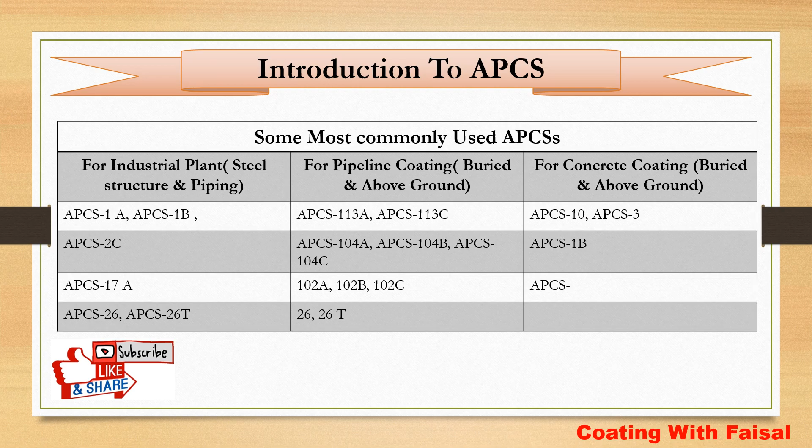So guys, this video will be very informative, and maybe it will be long, but you should listen and watch this video very carefully if you are new in the field of coating, or already working in coating as a coating supervisor or coating inspector. This will increase your knowledge. So now we move to our topic.

What is pipeline coating and what are the types of coating in the pipeline? First of all, we categorize the pipeline into two portions: the buried term and the above ground term. Buried means the pipeline which is buried below the ground level, or buried in the sand. It can also be buried in the sea. So for the buried pipelines, we perform two ways of coating, depending upon the requirement: one is external and the second is internal.

First of all, you have to clear your knowledge regarding what is external coating and what is internal coating. External coating means the outer layer of the pipe is coated. Suppose the pipe is buried, and we have to coat the external layer to protect the pipe from rust and from soil behavior - this will be the external coating. Internal coating means the inner portion of the pipe is coated.

This depends upon the service which is going to pass through the pipeline, on which basis we decide whether internal coating is required or not. All buried pipe is externally coated, but not all buried pipe is internally coated - this is decided on the basis of the service. Sometimes severe chemicals or streams pass through the pipeline which will affect the inner portion of the pipe, so we protect that inner portion with coating. Otherwise, normally the pipe is not internally coated, but all pipe is externally coated.

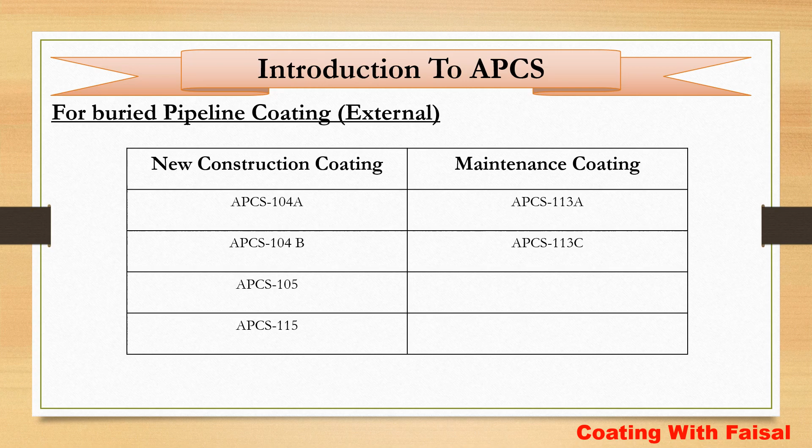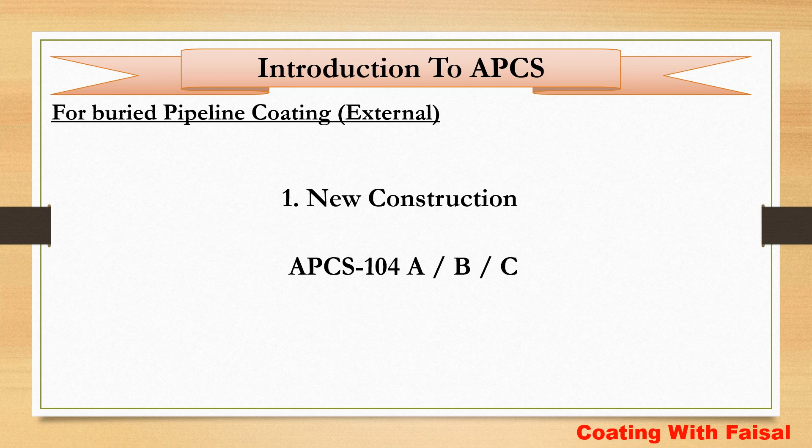But as a coating inspector, there should be some knowledge, some information definitely known, whether it belongs to the contractor or not. In this video we will discuss only the surface profile requirement and the coating thickness for new construction coating. So first of all, APCS 104A, B and C. This is only one coating system, but it's subcategorized into three divisions: APCS 104A, 104B and 104C. Now we will see what is the difference between these three types.

First of all, APCS 104A. This is titled Shop Applied Fusion Bonded Epoxy. As I already told you, new construction coating is performed in the workshop, so the title reflects that shop applied means this application is not performed on the site, it's performed in the workshop. Next is fusion bonded epoxy.

What is fusion bonded epoxy? This is a type of coating, same as some coatings are epoxy coatings, some coatings are viscoelastic. And what is fusion bonded? This is a powder coating applied by machine, not by manual applicators. So this is the powder used during the application of fusion bonded epoxy.

The pipe is preheated to about 200 or 220 degrees Celsius, as decided by the coating manufacturer. The coating is applied in the form of powder. When the powder falls on the pipe surface, which is already preheated to about 220 degrees Celsius, it melts and forms a layer on the pipe. All of this function is performed by the FBE application machine, not by any applicator.

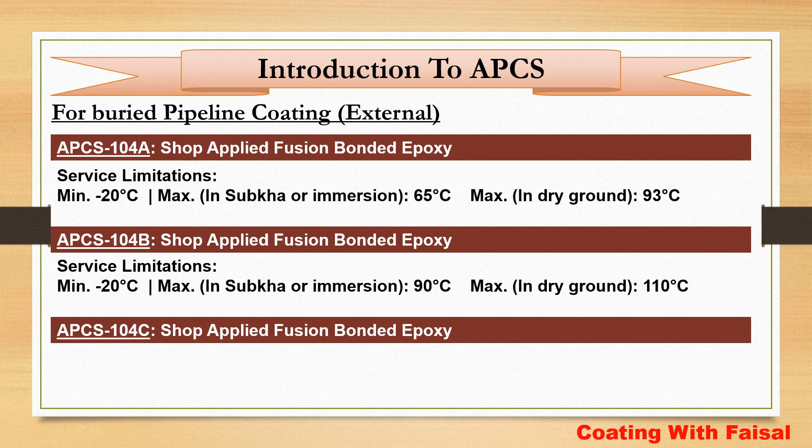Next, APCS 104C. This is a service temperature rating - you can see it can bear the temperature of whatever passes through it up to 130 degrees Celsius.

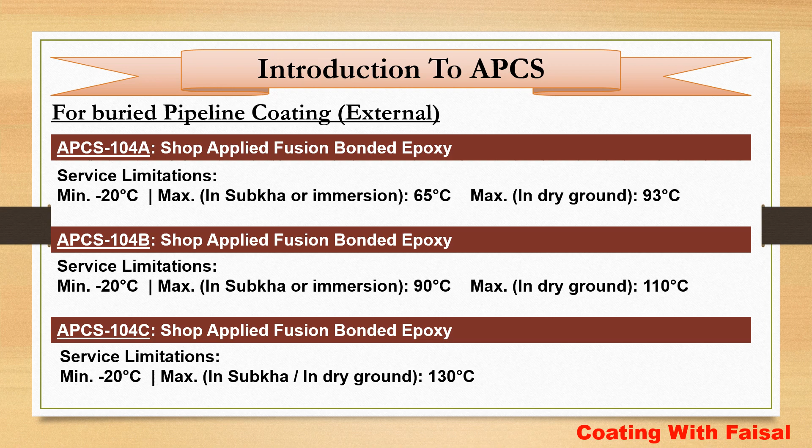On the site we can only perform FBE coating for the girth weld areas, because when the pipe arrives on site, it should be joined - there are some joints, some girth welds. That's why as a coating inspector you also need knowledge of the surface preparation required before the application of fusion bonded epoxy.

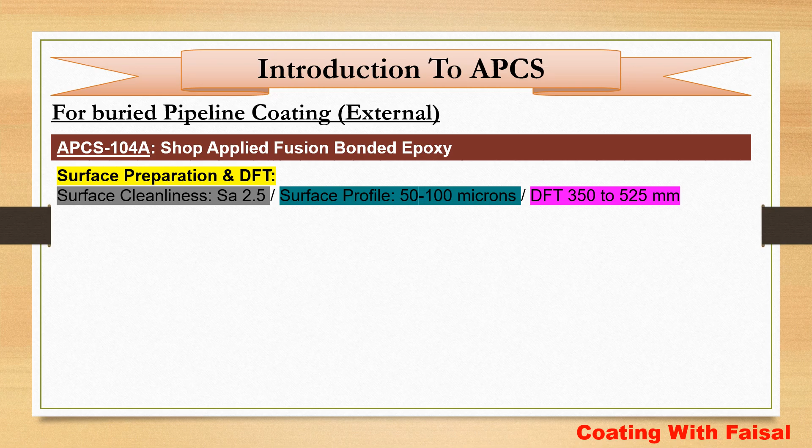The cleanliness level should be SA 2.5, and in the previous introductory video I already shared what surface cleanliness is and what the levels of surface cleanliness are. SA 2.5 is the near white metal blast cleaning, and the surface profile range is 50 to 100 microns.

The next one is the dry film thickness. DFT should be 350 to 525 microns. This is the requirement for APCS 104A.

Next we see the requirement of APCS 104B. The surface preparation is the same, only the difference is dry film thickness. The DFT range for APCS 104B is 575 to 750. Why is it more than APCS 104A? As I already discussed, APCS 104B can bear more temperature compared to APCS 104A, so definitely the thickness will be higher.

Last one, APCS 104C. The surface preparation requirement is the same as B and A, but the thickness should be as per manufacturer recommendations.

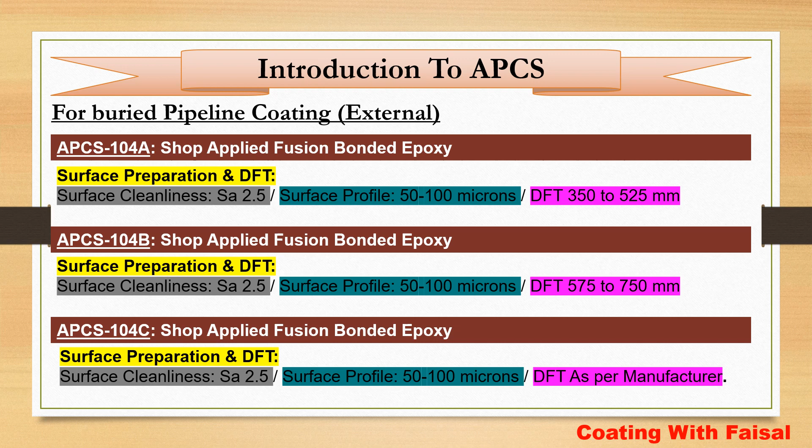So guys, next we discuss the FBE coating externally and new construction coatings. Now we move to the next topic, regarding maintenance coating.

In maintenance coating, first of all there is APCS 113A, and the title of this type of coating is high build epoxy.

It's also called epoxy mastic coating, and this is a very important type of coating used in pipelines for maintenance work.

As I told you in the beginning, as a contractor coating inspector, most of your scope of work is maintenance work, because new construction coating is applied in a workshop for the pipeline. This is not part of the contractor inspector's role, it's part of the vendor inspector's role.

So most of our jobs are available on the contractor side, and on the contractor side we have maintenance work for the pipeline. In maintenance work, the most commonly used coating is the high build epoxy.

So you should listen to this type of coating very carefully. I already shared the important topics which can be asked in the interview regarding this type of coating.

So we move to maintenance coating. First of all, 113A, and the second one is APCS 113C. This is the viscoelastic coating.

What is the viscoelastic coating? It means it is a tape wrap. It's not a liquid application, it is a wrapping application, and we will see this in the pictures also in the coming slides. So first of all, let's get some details regarding APCS 113A.

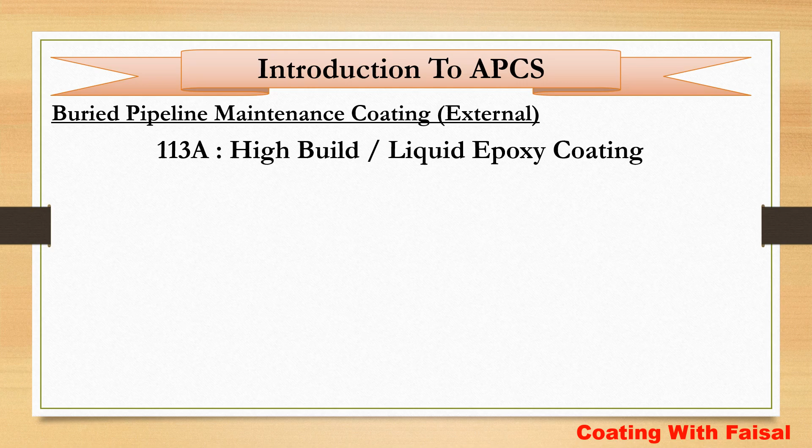The surface preparation requirement: surface cleanliness level SA 2.5, the surface profile range is 65 to 100 microns. Next, some important parameters which differentiate this coating from other liquid coatings.

You must remember these parameters because these are the specific properties of this type of coating which differentiate it from other types of coatings.

First of all, it's a multi-component coating. What is multi-component? It has three components: base, hardener, and thinners, and the mixing ratio will be decided as per the manufacturer data sheet.

Next is high volume solids. What is volume solids? Volume solids is the solid content which is left behind on the surface after the paint is dried. So the higher the volume solids, the less the difference between the WFT and dry DFT.

Next is single coat coating. There are only a few coating systems in Saudi Aramco which are single coat, and this is one of them - it is applied in only one coat. It should not be applied in multiple coats.

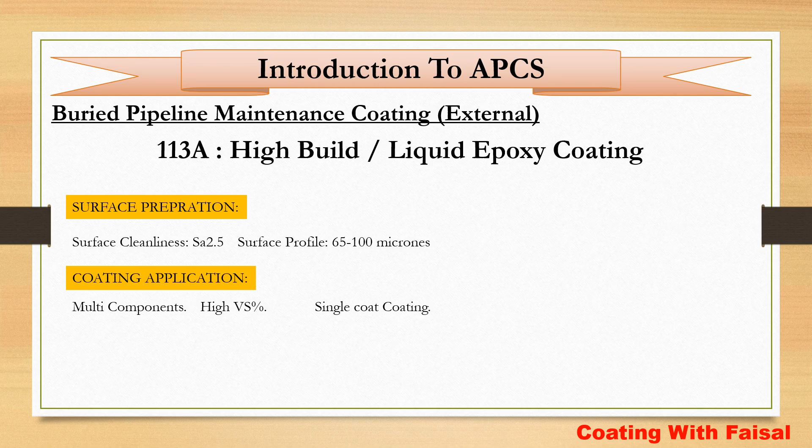But due to high volume solids and high thickness, it's difficult to maintain the thickness, so this coating is allowed to be wet on wet coating.

Now definitely you will think, what is wet on wet coating? Wet on wet coating means if you apply one layer and it is still wet, you can apply the second layer.

to maintain the thickness, because if you give more wet film thickness at one time, your paint definitely will sag, it will flow down. So what is the technique for this type of coating? You should apply wet on wet coating in one or two layers, but the coat should be single.

The next point regarding this coating: the WFT should be 610 microns to 1010 microns, and dry film thickness will be 600 microns to 1000 microns. Here you can see there is a very minor difference between the WFT and DFT for this type of coating.

This is because of higher volume solids. From the definition of volume solids, we can see that the solid content in the coating is left behind. So the higher the solid content, the less material will evaporate, and the difference between WFT and DFT will be very low.

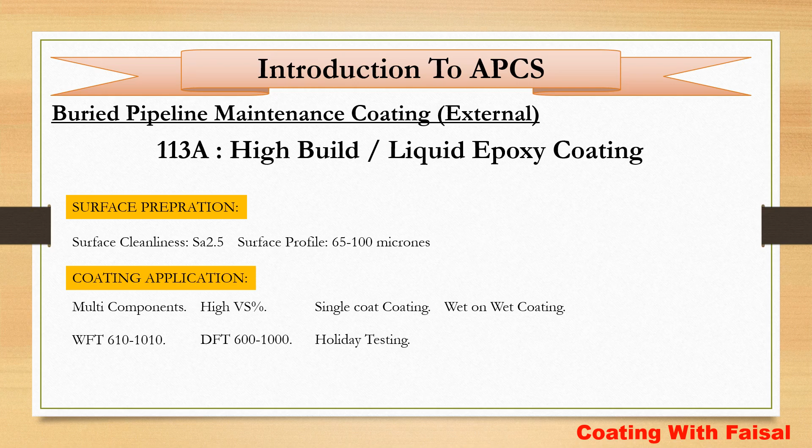Now we move to the second type of maintenance work, APCS 113C. This is the viscoelastic coating, which I told you is a tape wrap.

For 113C, we most commonly use STOPAQ, which has two wraps. The first is the CZH inner wrap, also available as CZH paste, where CZH is the material name. The second part is the PVC outer wrap, also in tape form, and it is black in color.

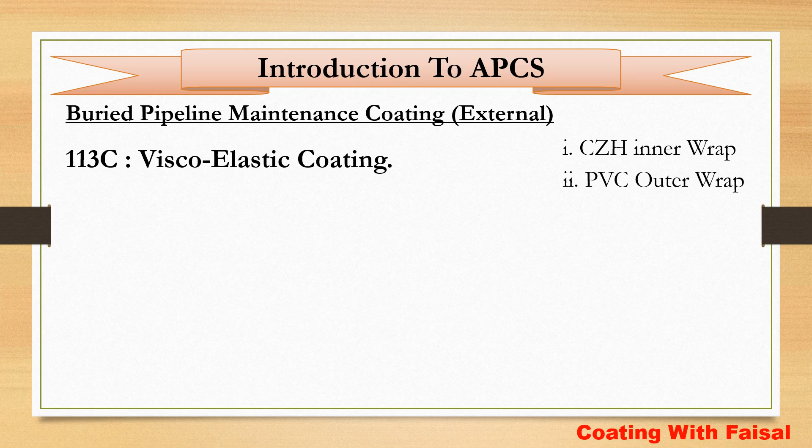This is the monogram of STOPAQ. Any product with this monogram means it's a STOPAQ viscoelastic coating, applied in two portions. The first portion is the inner wrap, normally green color, and the outer wrap is black color - this is the PVC outer wrap.

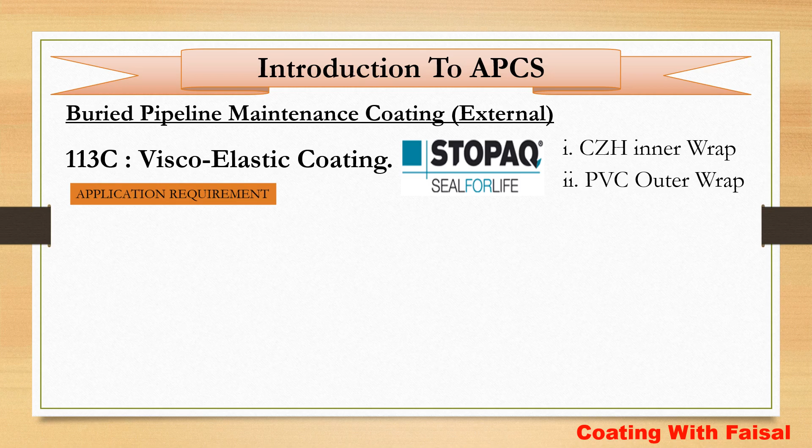What are the application requirements for STOPAQ? First, personnel involved in protective coating activities shall be qualified and certified to perform their task. Any applicator willing to perform this application should be certified from STOPAQ. STOPAQ will give them training on how to use their product, what the overlapping requirement is, and what the seal wrap is. All these trainings are given by STOPAQ, and once the applicator is qualified, they give him a certificate, called the qualified certificate.

This means an unexperienced person cannot perform this job, is not allowed to apply this STOPAQ. The second requirement is that blast cleaning is recommended if the pipeline length is more than 1 meter. This relates to surface preparation - if the pipe length is more than 1 meter, it should be blasted before performing the STOPAQ application.

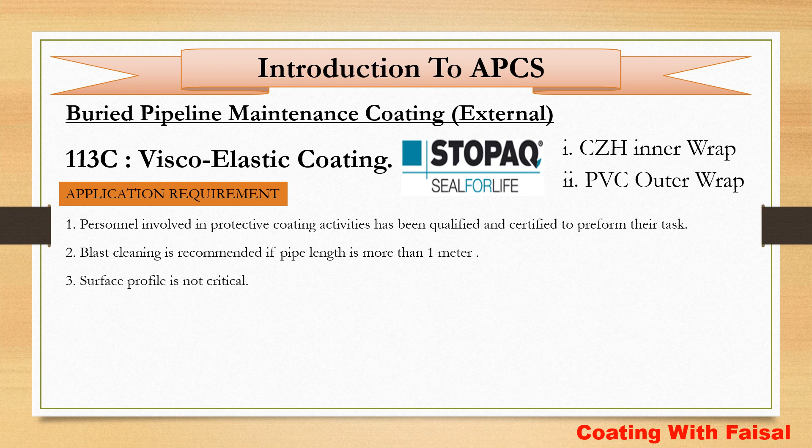The third one is that the surface profile is not critical. As we discussed previously, surface preparation involves two things: surface cleanliness level and surface profile. For the STOPAQ case, the surface profile, or roughness, is not critical, but surface cleanliness level is critical - it should be Sa 2.

For using CZH paste in areas which are not properly smooth, suppose there are some flanges, wellheads, or pumps - those are not uniform, so we apply this wrap differently. We apply the CZH paste, and as you can see in the next picture, there are flanges and uneven surfaces where we cannot apply the inner wrap uniformly or smoothly. So in those areas we use CZH paste.

What is the requirement? The CZH paste should be applied from the higher level to the lower level, or from the higher edge to the lower edge. Once we apply the CZH paste, we should immediately apply the CZH wrap, because for uneven surfaces, flanges, and sharp edges where we cannot directly apply the CZH wrap, we first apply the CZH paste, then immediately apply the CZH wrap, and then the PVC outer wrap.

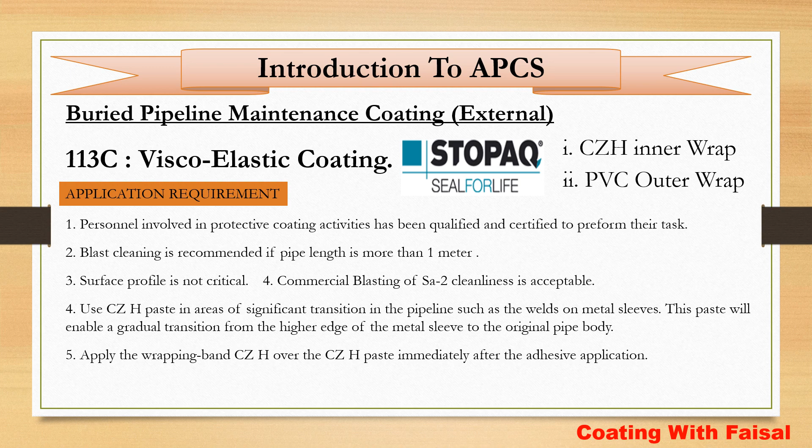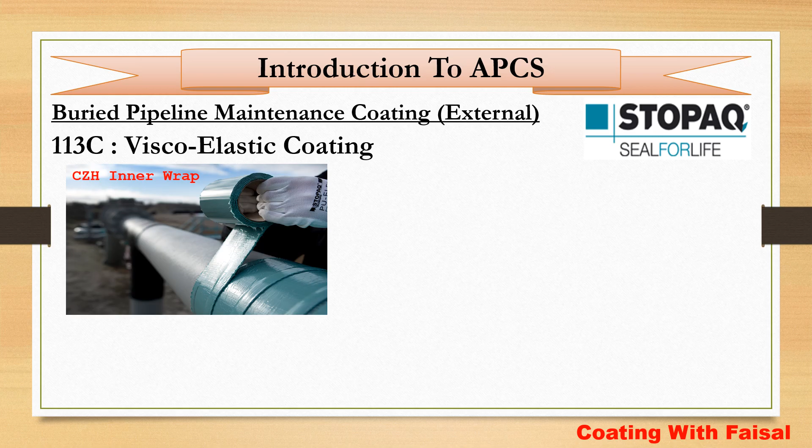Next, you can see the CZH inner wrap in the form of wrapping, and in the second picture the CZH paste. If we want to apply this wrap directly, it's not possible because this is an uneven, not smooth surface. To make the corner smooth, we first use CZH paste, then immediately apply the CZH wrap, and after that finally apply the PVC outer wrap.

This is the most important thing: the inner wrap shall be applied without tension or stretching. This is one of the most commonly asked interview questions regarding pipeline or STOPAQ coating - whether we can apply the inner wrap with tension or stretching. Your answer should be that the inner wrap shall be applied without tension or stretching the roll.

Next, we will see the procedure for applying this CZH wrap. The first wrap round of the wrapping band is done without advancing the roll. What is advancing the roll? The first wrap should be completed circumferentially - you cannot move longitudinally along the pipe. This is the meaning of without advancing. First you complete one circumferential wrap, then you can move longitudinally, or advance the roll.

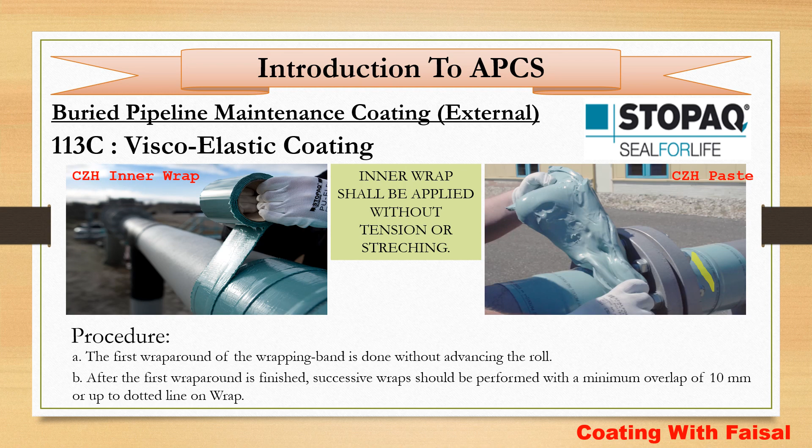Here we see this next one is a buried pipeline maintenance coating. Now we will discuss the outer wrap.

It says that when a roll of the wrapping band is finished, the next roll should start with an overlap of at least 100 mm. It means suppose you are doing the application and your one roll is finished and you're using the second roll, so at least you will give the 100 mm overlap to the existing wrap, then you can move the advancing roll.

Next, after the pipe is completely wrapped, another circumferential wrap is done at the pipe at the end, and this acts as a seal wrap. So once you finish your job, suppose your inner wrap is complete, at the end of that wrap you should apply one more wrap circumferentially. This is known as a seal wrap, and this will make sure that your corner or edge will not be removed.

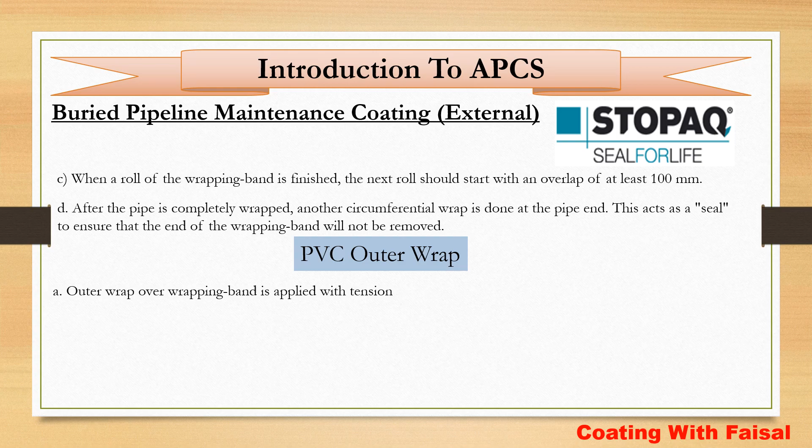As we already discussed in the previous slide, for the inner wrap, the inner wrap shall be applied without tension and without stretching. But for the outer wrap this is completely opposite - the outer wrap shall be applied with tension or with stretching. You must remember this difference between inner wrap and outer wrap for stretching and tension.

Next, the wrapping band of the outer wrap shall start 5 mm from the start of the wrapping. It means you should start the outer wrap by leaving a 5 mm corner exposed, so it should be visible. The inner wrap should be visible for the 5 mm. This will reflect that you already applied the inner wrap and now you are applying the outer wrap.

The next one is the first wrap of the outer wrap, overlap wrapping band is done without advancing the roll, same as the previous internal wrap. The first roll circumferentially should be without advancing. First you complete one roll circumferentially, then you should advance the roll, or move the roll longitudinally.

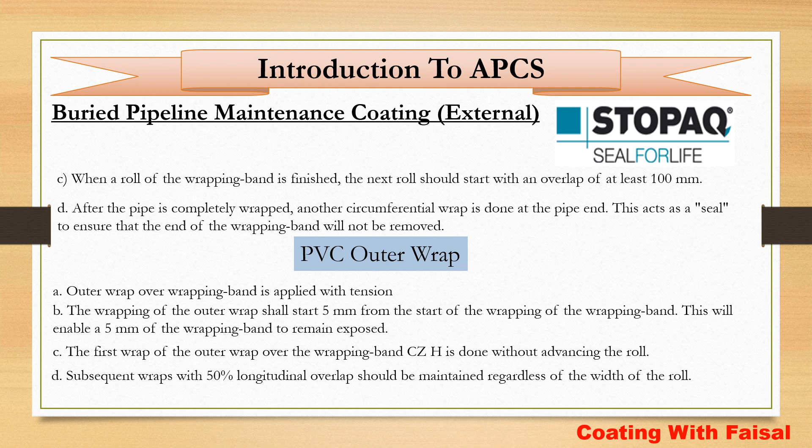And since we discussed previously that for the inner wrap the overlapping is 10 mm or as per the dotted line, for the external wrap the overlapping is 50% of the width of the wrap, regardless of what width we are using. It means suppose we are using the outer wrap of 25 centimeter width, or we are using the outer wrap of 40 centimeter width, the overlap will be 50% of that width.

So the next one is, if a roll of outer wrap is finished, the succeeding roll shall be initiated with an overlapping of 25 centimeter. You should remember the difference between the inner wrap and the outer wrap - in the inner wrap, the overlapping is 10 centimeter, but for the outer wrap, the overlapping is 25 centimeter.

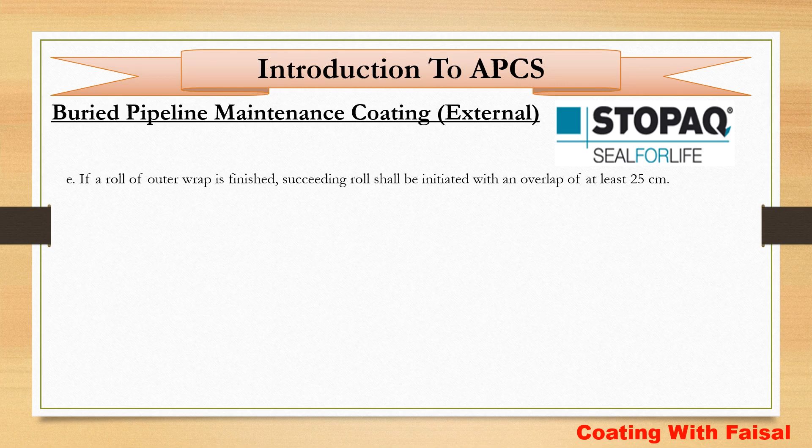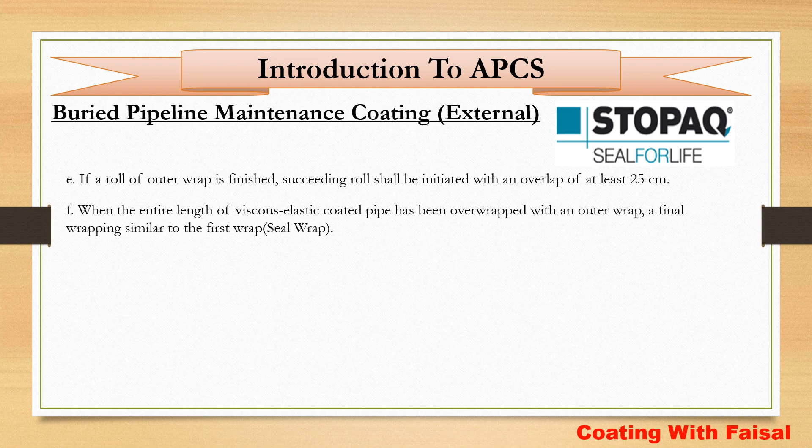This is the difference for both wraps, and same as the inner wrap, at the end of your work you should apply the seal wrap - one additional circumferential wrap.

So guys, since this is already a detailed video, and already a little bit long, it is difficult to explain in detail the second one, Canusa application. This is also a part of maintenance coating for the pipeline, and if you need to review further coating systems in detail, you can study the Saudi Aramco engineering standard H002.

For the application of Canusa CPS, this is also a viscoelastic coating, and another manufacturer is STOPAQ, which is most commonly used, and Canusa is also extensively used for the maintenance work of the pipeline.

So for the Canusa, there is a difference - another video will be available, so you can see the details of the Canusa in that video.